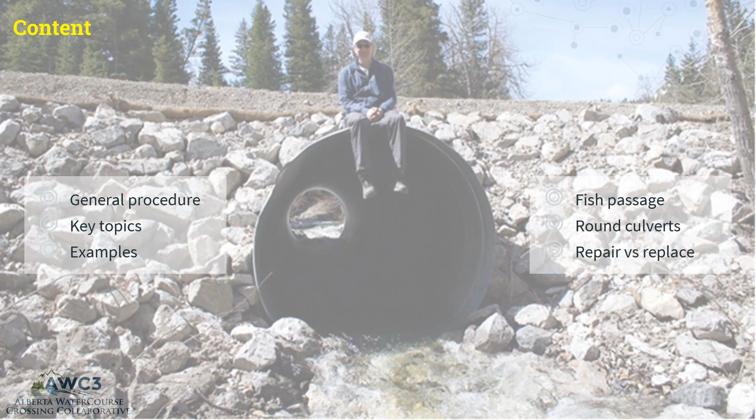Regulatory references. I'm going to skip through a lot of this, or at least just skim through it, because Michael Hunka gave a presentation on Tuesday about this, so I don't want to repeat that. I'll just hit a few of the highlights.

Related to watercourse crossings, you have the Fisheries Act, the Water Act, and the Public Lands Act. Related to the Water Act, you have the Code of Practice for Watercourse Crossings and the Roadway Watercourse Crossing Remediation Directive. The Crossing Directive is the piece that motivated a lot of the work that we're doing on watercourse crossings nowadays. Some of the other tools you need in your pocket are the design guidelines for bridge-sized culverts by Alberta Transportation, and the companion document to that, which is the Fish Habitat Manual.

Some highlights I want to touch on, in addition to what Michael said on Tuesday: if you're building a watercourse crossing based on the code of practice, you need a QAES sign off. QAES is a qualified aquatic environmental specialist or fish biologist, and you need an engineer and owner sign off on that - either an engineer stamp or an owner's signature.

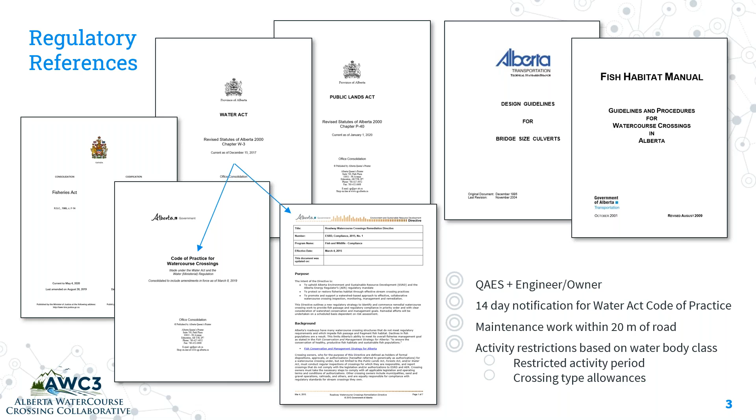Activity restrictions - Michael touched on this on Tuesday. They're based on water body class, and you either have restricted activity periods for certain times of the year, and different crossing types that you're allowed to build.

Class A streams are the most sensitive, and Class D streams are the least sensitive. Clear span or open bottom structures, or type 1 structures, can be built anywhere in any of those types of crossings.

Crossings that are not clear span but have in-stream abutments and are still open bottom are type 2 crossings. You can build those on unmapped Class B streams, or Class C or D streams, the same as closed bottom types. But you may be required to justify those choices by showing that the type 1 is not feasible or not practical.

Ford crossings are not culverts or bridges. A ford crossing is when you drive through the creek and the crossing is designed for that. Those are allowed on Class C and D streams.

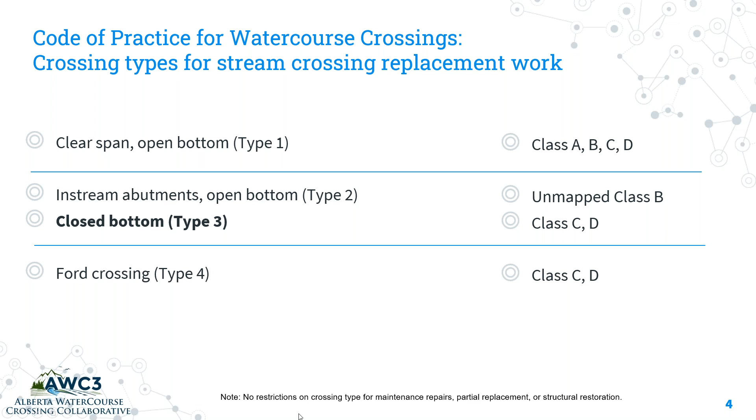After you have culvert inspection results, you probably have a culvert inventory and have prioritized your culverts. What's next? The inspections identify measurable things such as high velocity and hanging culverts. Hanging culverts are especially easy to identify when you have a waterfall at the outlet, and those are pretty easy to pick off during an inspection.

Frequent washouts are an indication that your culvert is undersized, and if you have a history of washing out your culvert, that may show up in your inspection results as well. In the inspection, you'll also take note of local erosion and pipe damage.

These are things you can easily see and measure, and there are a number of underlying causes for those things. The high velocity may be due to an undersized culvert. The same could be said about a hanging culvert with too much scour downstream. The inlet and outlet configuration could be contributing to this.

A long culvert may also be part of the issue, and there may be other design flaws or poor construction. If you have pipe damage such as corrosion, it may be the soils you're working in.

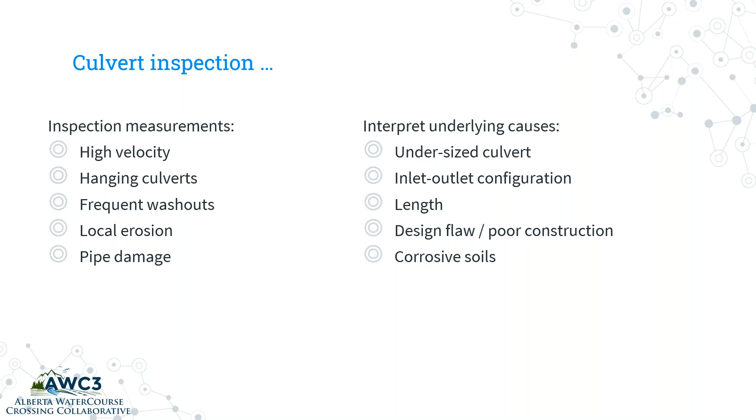There's a number of considerations - I'm not going to go into detail about all of these. Of course, fish passage is a big one. Our topic is primarily about fish passage and the repair of culverts for fish passage. But as we try to decide what to do about it, there's quite a few considerations.

The geology or geomorphology is one of those. You might be in a young stream that's actively degrading - there's lots of streams like that up in the Grande Prairie area. So those streams may be lower than they are today; they could be eroded down lower 10 years from now compared to today.

Your foundations are also a consideration, and bedrock control is something you would want to know about.

Transport and assembly - whatever you decide to do, it has to be constructible. You have to be able to get it to the site and assemble it. End treatments are a pretty common question, and something you would probably consider on the inlet side of things.

Suitable backfill material - we'll talk about that a little bit today. Embankment stability is more of a geotechnical topic; I'm not going to talk about that today.

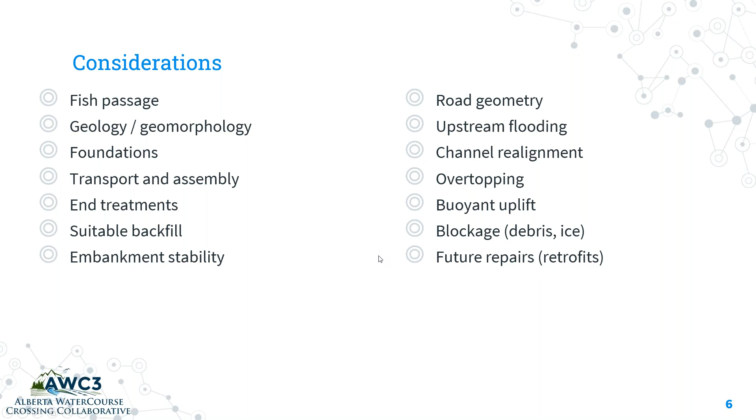And of course, there's so many options nowadays. There's not just round CSP culverts, there are many options, and the problem is actually how to decide. There's almost too many options. So before you jump to the conclusion of replacing your culvert, I think we should talk about it first, because replacing the culvert will probably cost you more than $100,000, even though it's a fairly straightforward earthworks project.

So when we start to assess the culvert, what are the key questions? The first one is identifying the key issues. If the hanging culvert is the only key issue, then we can deal with that as the key issue. But the culvert may also be very steep, resulting in a high velocity, so it's important to understand upfront what the key issues are.

And then we can look at solving those key issues. Is the culvert damaged? So if the culvert is damaged such that it's threatening the road, then let's go ahead and replace it.

Another key question is, is the culvert big enough, which is something that you can't necessarily see when you're doing your inspection. So it's something we would have to assess off-site. And then there's usually site constraints, which are mostly related to the road geometry and how busy the road is.

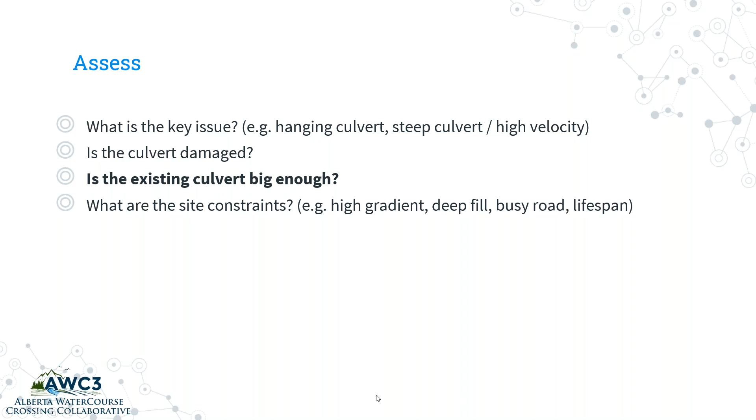So is the culvert big enough? That's something we normally do in the office, as a desktop exercise. You need to understand the drainage area contributing to the culvert, your design flow for conveyance, your fish passage design flow, the channel geometry, and the road geometry. Those are kind of the inputs.

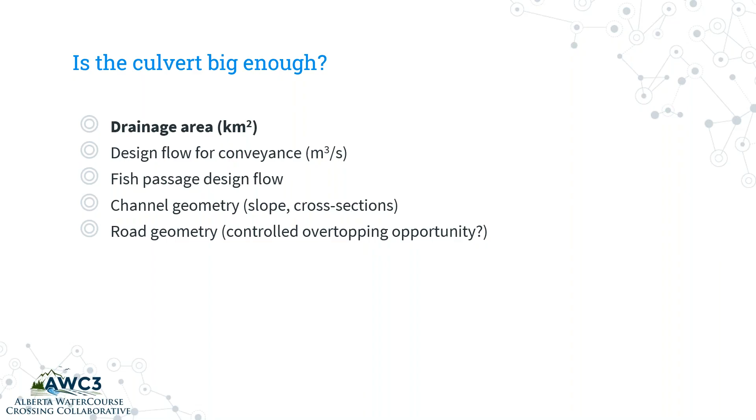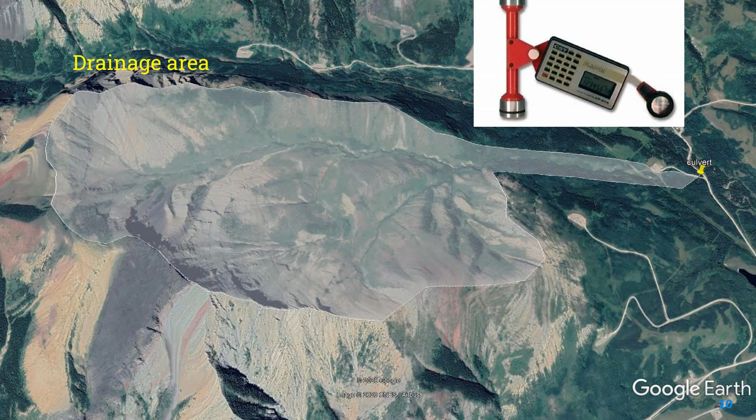Conveyance capacity. The traditional method for estimating the amount of flow you need to be able to handle in your culvert is a regional hydrology assessment using Water Survey of Canada gauge stations. So you'll look for a nearby river that has gauges on it, do your statistical analysis on the data, and choose a design flow based on that.

So a 25-year return period flood would be the minimum that you would look at, and quite often you can design for the 100-year flood without increasing the size of your culvert too much. So the additional cost of the steel is relatively small compared to having to deal with washouts.

And I had a boss many years ago who used to go around saying that the 100-year flood happens about every 20 years. So he was half joking but half serious. And we do have big floods—they happen, and they don't always follow the statistical distribution.

Alberta Transportation currently has recommendations for conveyance capacity that are a little bit different from what I just explained. So they look at channel capacity, which a lot of us would interpret as the 2-year or bank full flow.

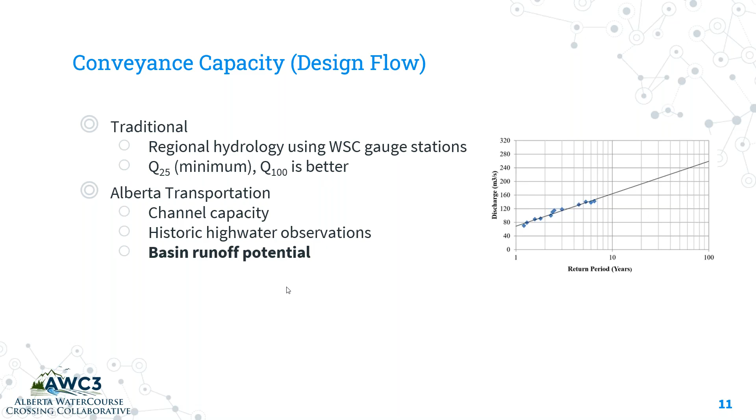Historical high water observations are useful where you have them. There's actually a bridge database with a lot of high water observations for the province. Alberta Transportation maintains that, and they use a basin runoff potential calculation, which should give you similar results to the regional hydrology, but maybe a little bit more consistent.

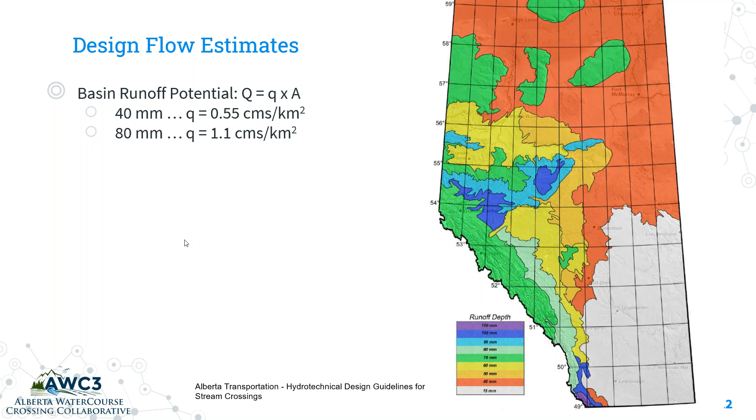Where a lot of us work along the foothills, you get 80 millimeters of runoff potential, and that results in about 1.1 cubic meters per second per kilometer squared. So there are some options for estimating your conveyance capacity. These are 2 of them.

Fish passage design discharge: the traditional manner of estimating that was provided by Fisheries and Oceans Canada, and that was for many years something called the 3Q10, or the 3-day delay discharge with a 10% chance of exceedance. So the basis of that is that you would only want fish to be stopped from migrating upstream 10% of the time, or once every 10 years. And it also assumes that fish are willing to wait a maximum of 3 days before they need to migrate.

So that traditional approach has evolved over the years, partly to say that fish are willing to wait longer than 3 days in some cases. So Alberta Transportation has a current standard which is similar to the 2-year flood level. And I want to get this right because it is a little bit different. Their current standard is to allow for about a 20% increase in the average velocity of the channel.

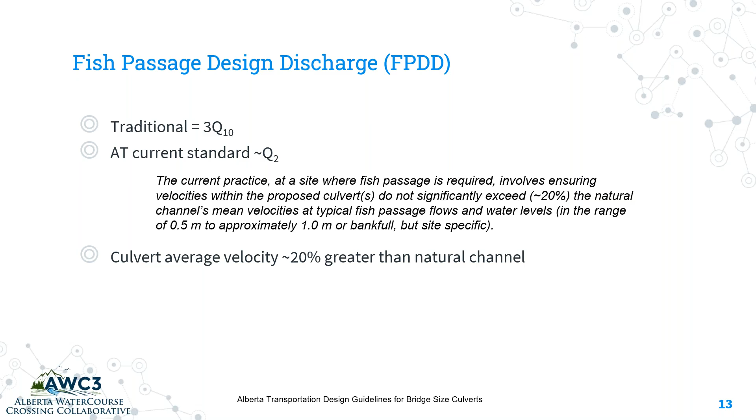That would be in the range of a bank full condition. Your bank full condition would be similar to your 2-year flood on a statistical basis, and you would allow the average velocity to be increased by about 20%. So what does that mean?

In a round culvert, if you were to increase the average velocity by about 20%, the area that the fish have to move upstream gets reduced. So it might be reduced from about 40% down to about 20% of the flow area within the culvert. And that's just based on the velocity distributions that are characteristic between the channel and the culvert. So it gives a bit of a smaller area to swim in, but fish can still get up.

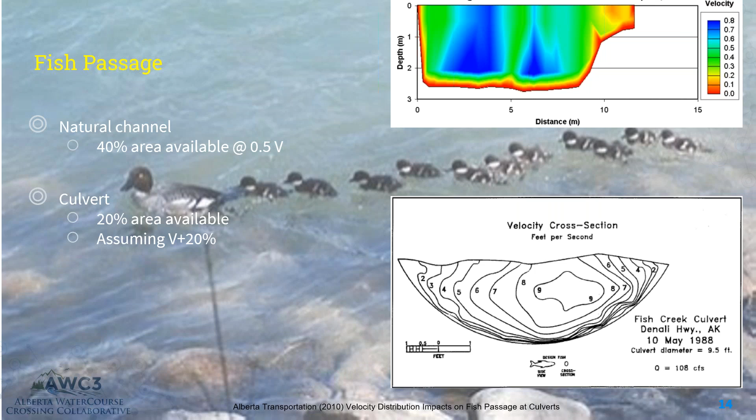Long culverts are an issue for fish. Most culverts are on the order of 20 meters long, and so at 1 meter per second, 20 meters would take about 20 seconds, depending on the type of fish. Salmon, walleye, and trout are strong swimmers, and pike are not. So there's different species and different swimming abilities. But long culverts are an issue for all kinds of fish.

I know this is not correct, but I'll say it anyway because I'm not a biologist: fish are kind of like people. They can sprint for short distances, they can jog for medium distances, or they can walk for long distances. So they are kind of like people in that regard. They can sprint for short distances, but they have athletic limits. So shorter culverts are better.

One of the factors related to the length of the culvert is the road embankment. The road embankment should be 2 to 1, 2 meters horizontal for every 1 meter vertical drop along the embankment, or flatter, and those are road safety standards. If you're on a highway that will be even flatter, it could be 3 to 1, and in some cases 4 to 1. But most resource roads, I think we build them at 2 to 1.

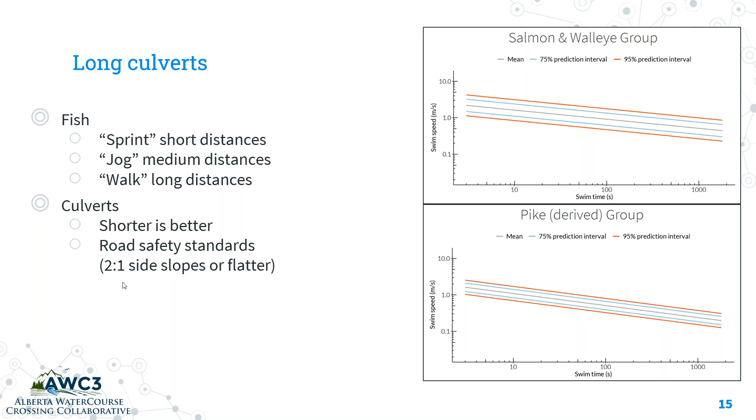Culvert hydraulics. To an outsider, culvert hydraulics are just a number. What's the size? How fast? As practitioners, we often blast through the culvert hydraulics with prepackaged software, but the science behind culvert hydraulics is really complicated. It's perhaps the most complicated analysis you will deal with as an engineer. You have to test inlet versus outlet control. You have energy losses at the entrance and exit. You have tailwater conditions that affect your culvert capacity, but those conditions are not a given like they would be in a university test. It's a simple structure with complex math required to find an appropriate design.

Some of the key things to pay attention to are that we want outlet control. Outlet control means that the tailwater controls the flow through the culvert. With tailwater controlling it, we have backwater conditions through the culvert, and the tailwater controls that.

Inlet control would be quite a bit different. Inlet control implies that you have supercritical flow, or really fast flow. I don't think we'll get into the difference between supercritical and subcritical here, but we do want the culvert to be outlet control. The way to get that is to keep the slope relatively flat. The flatter the better. There are a lot of guidelines out there that recommend culvert slopes anywhere from 0.5% up to 5%, but I would suggest that you probably cannot pass fish at 5%.

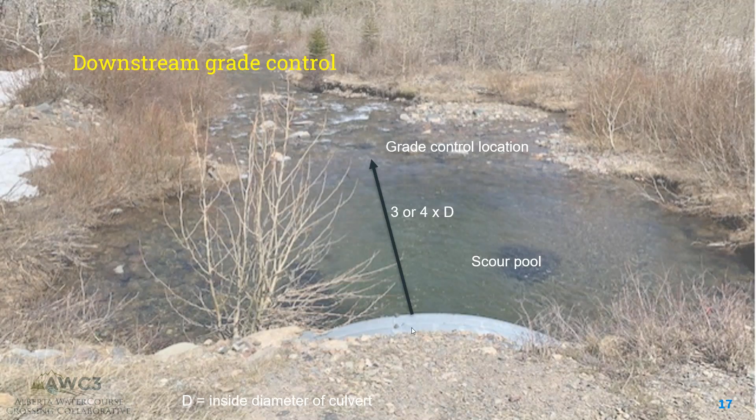It's a picture of an existing culvert that is not hanging. You can sort of see the scour pool downstream, and the grade control location is 3 or 4 times the diameter downstream. So that's the diameter of this, I think it's a pipe arch culvert in this case, times whatever that distance is. If it's 2 meters, then 2 meters times 3 or 4 downstream would be about 8 meters downstream, that's your grade control location.

So if the culvert is well sized with similar velocities compared to the natural channel, the end of that scour pool will be about 3 times the diameter downstream. If your culvert is relatively undersized, the distance to the end of that scour pool could be greater, perhaps 5 times the diameter. It's an indication that your culvert is potentially undersized.

I'm not going to spend time on this culvert installation. There's lots of considerations during construction, and these typical details are from the Saskatchewan Ministry of Highways. Of course, we're not in Saskatchewan, but I really like their simple, typical drawings.

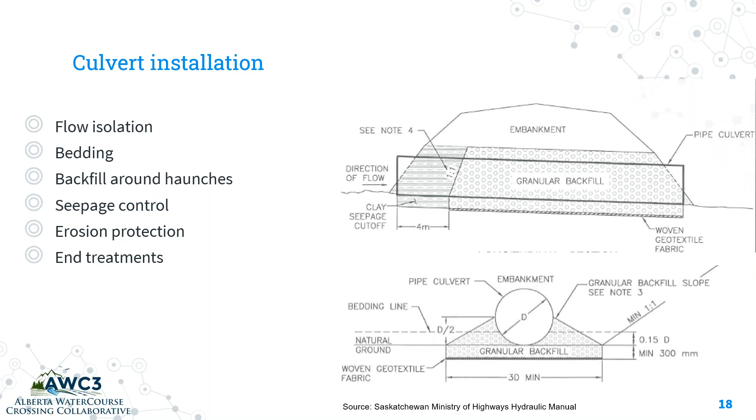When we're designing our culvert, we have to understand the different failure mechanisms and guard against them. Overtopping erosion is pretty common. Erosion due to piping through the fill is another one. Piping failure is where water finds a convenient pathway through the fill, through the embankment fill, and scours out a larger opening until all of the water goes through them. Buoyancy failure is, I think, the cause of a lot of culvert failures and not always recognized as the failure mechanism.

Other failure mechanisms include pipe corrosion, which is fairly easy to spot, and issues related to ice and erosion of the foundations. This is possible for open bottom structures.

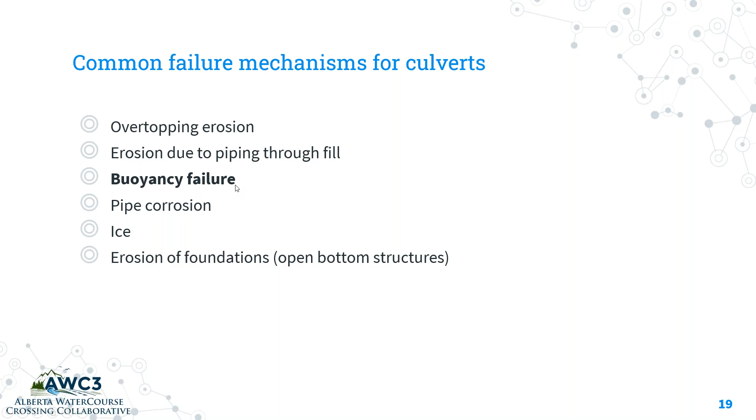But buoyancy failure, I think, is one worth showing you because it can be quite dramatic. This is the largest buoyancy failure I've ever seen. It's a 7-meter diameter round culvert in the Magrath area of Alberta, and it failed quite spectacularly.

The upstream side of the culvert is shown in the inset. It's standing up like a grain silo because the debris snagged on the inlet of the culvert, even though the culvert was so large.

The water level is higher than the top of the culvert, but because of the debris, the water level inside the culvert is only maybe half full. The rest of the culvert is full of air, and that air is buoyant, causing an uplift force that raises the inlet of the culvert.

So the buoyant failure happens at the inlet, and in this case there was 12 meters of fill material on the culvert. As soon as the inlet lifted, the culvert became kinked, lost its structural integrity, and the 12 meters of fill crushed the pipe.

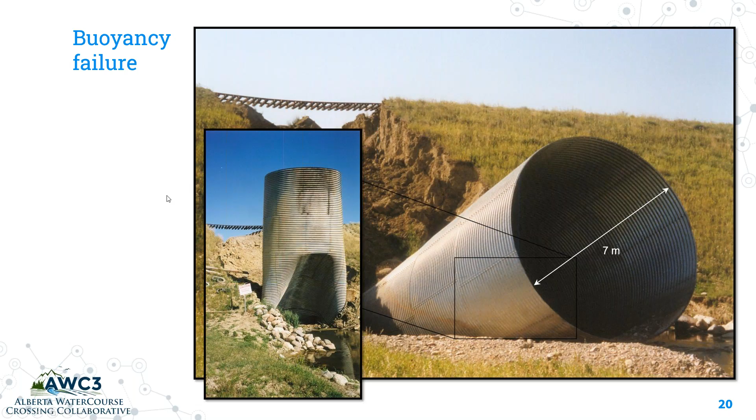There's a few other important bits. If you get into very big culverts, more than 2.2 meters diameter, you're into multi-plate assembly. That's where culverts come in pieces and you have to assemble them on site, so it's more labor intensive. At that point, you might want to consider either multiple culverts or a bridge.

You need a certain amount of space between the culverts, required to get proper compaction of the fill material between them. The road geometry is an issue. The culvert length - a common mistake is that people will

size the culvert length such that the toe of the embankment slope coincides with the end of the culvert. That would be a mistake. It results in a really long unsupported section, and it could expose your culvert to buoyant uplift forces. So the recommended practice is to set the end of the culvert along the embankment slope as shown.

Cover depth depends on the traffic and the size of the load on your road. 300 millimeters would be the minimum, and if carrying large loads, you may want more than that.

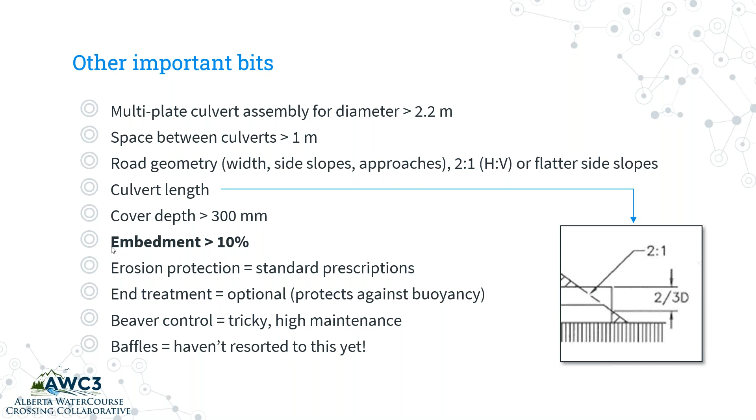Embedment is something I'd like to talk about. An embedded culvert is one where the bottom of the culvert is set down below the grade of the stream bed. This allows natural sediment to fill in the bottom of your culvert so that it appears to be like an open bottom culvert. It's something that can be considered in a lot of places.

These pictures are from, I guess it's becoming a fairly old document now, but in British Columbia they've done a lot of work related to embedded culverts. I have 3 examples for you, and I thought I would have more time than this, but I do have 3 examples.

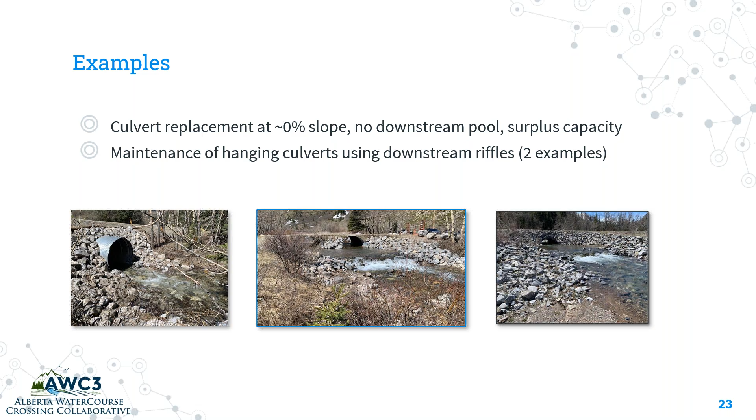The first example is a round pipe. It was a culvert replacement project - the original culvert was undersized and had a hanging outlet. I'm not showing before-construction pictures; these are all after construction. The outlet is on the left side and the inlet is on the right side.

In this case, the culvert used to replace the old one is relatively oversized - oversized for conveyance purposes as a precaution for ice and debris. It's also got an embedded inlet, which allows us to install the culvert at close to zero slope. You can't really see it inside the culvert, but the velocity inside is really low.

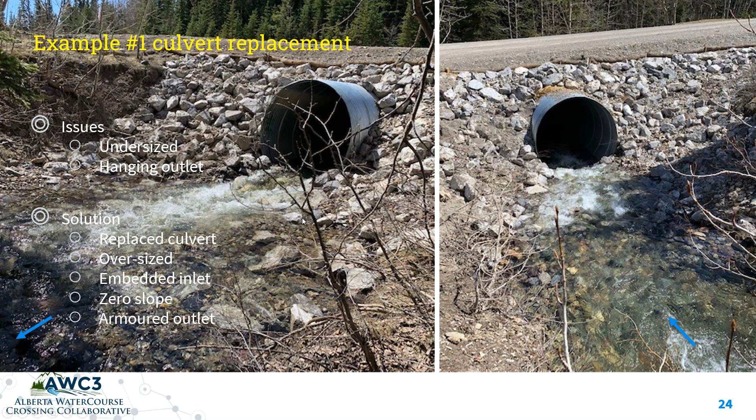And then there's an armored outlet. It would have been nice to embed the outlet as well, but space was a constraint here. I think one of the most impressive things about that culvert is that the amount of disturbance used to install it was so small - there's still trees growing nearby.

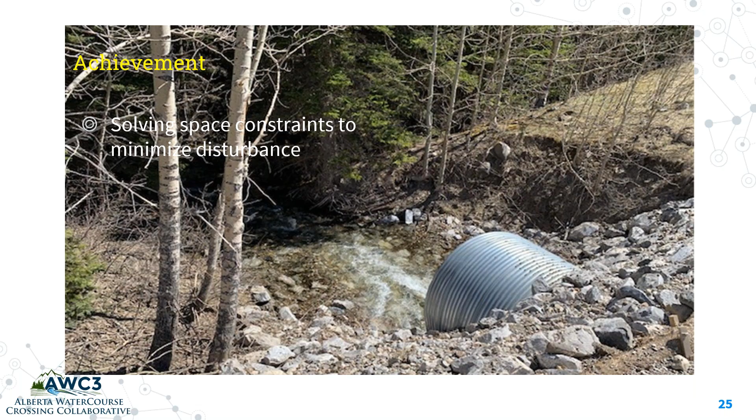As a third example, this was a culvert repair, not a replacement. There are two pipe arch culverts with very little cover on the road. This is a view from the upstream side, showing insufficient depth, and at the time it was a high traffic road—that has since changed. This photo is indicative of normal high spring flow.

The solution we picked here was to install a riffle downstream to remove the hanging culvert condition. The riffle that was constructed is the first white water you see downstream of the culvert, and all the other white water sections further downstream are natural. So the first one is man-made, and the rock on the side is erosion protection, with the scour pool in between.

Although it looks like a lot of sediment has accumulated in that area, this was constructed two or three years ago—I think it might have been three years ago—so it looks like there hasn't been a really large flood since then to scour this out. It also looks like a few stones may have moved over the last few years, but it still looks like it's in pretty good condition. Stones will move; you can't expect stones to stay in the same place forever.

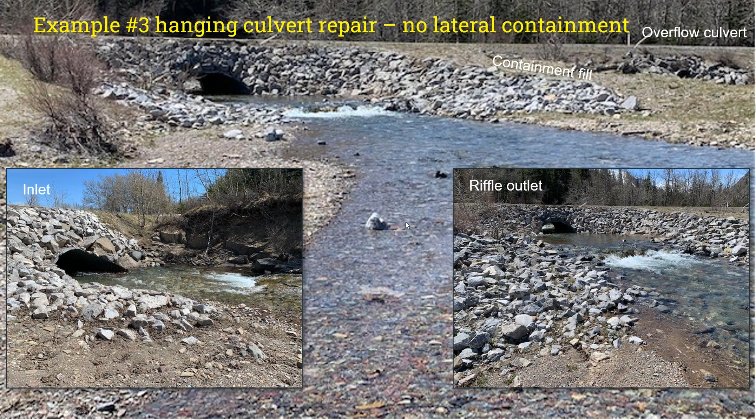So as part of this riffle design, we installed a containment fill to keep the water headed in the right direction. Of course, you can always build a bridge, and that's always most preferred by regulators. If you build a lot of bridges like West Fraser does, you get good at it, and the price point between a bridge and a culvert can become a small difference. In this case, this bridge was built in the early 2000s and has survived a couple of big floods.

The length will depend on your road geometry. But if you cross the road at a right angle and not at a skew, then you have a chance to minimize that length. Otherwise, you would have to start playing games with the road geometry and the road approaches. But most road owners would rather not do that.

The headwater depth ratio is negotiable. So using a ratio of 1 would be ideal, but depending on the situation, you may be forced to do something different. Okay, thanks.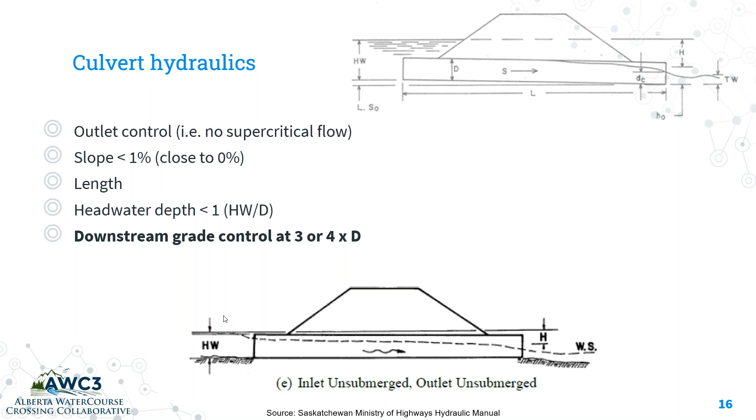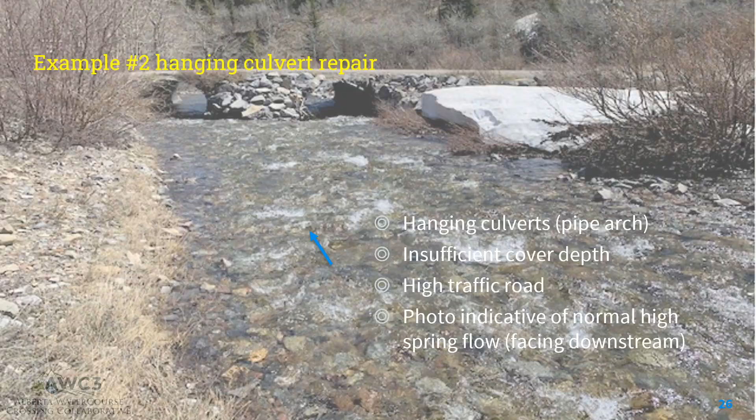This next question: in example number 2 of those 3 examples you were showing at the end, with the constructed riffle, was there consideration given to whether fish can migrate through that cascade? Yes, there was a QAES on site during construction and following construction to provide an opinion as to their ability to pass over that cascade. You have to remember that the flow during that picture is relatively high flow in the spring, that's the normal high flow.

But at first glance, it does look pretty high, doesn't it? It does, yeah, in that photo.

All right, the next question - that was the same question, sorry. So what kind of inspection requirements are there for bridges? Just trying to understand when a bridge should be used over a culvert.

Yeah, that's a whole separate story. There are bridge structural inspections that are required. Culverts don't usually have those kinds of inspections, but bridges do. So there would be additional due diligence by the owner for bridges. And I think if you go to Alberta Transportation, there's more details about that.

Can you elaborate more on baffles in culverts and the rationale for their use and non-use? Thank you for asking. I forgot to say that the reason I don't like baffles is because they tend to snag debris, and when you start snagging debris, you end up with a culvert blockage, which could wash out your road. So I would rather not use baffles.